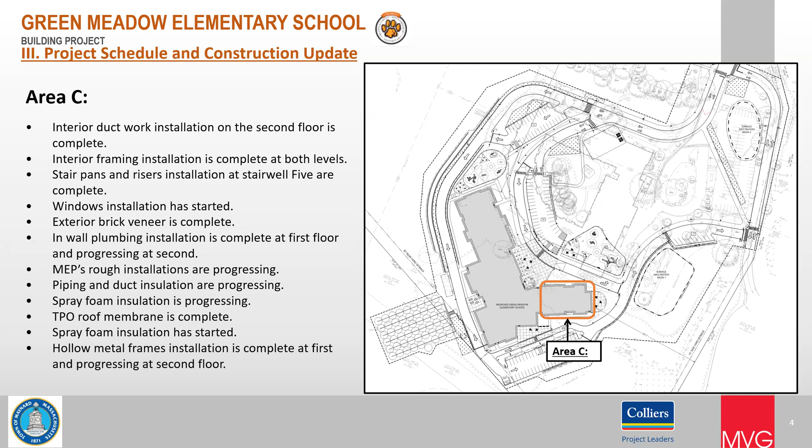Piping and duct insulation is progressing. Spray foam insulation is progressing. TPO roof membrane is complete, and spray foam insulation has started. Also, hollow metal frame install is complete at the first floor and progressing at the second floor.

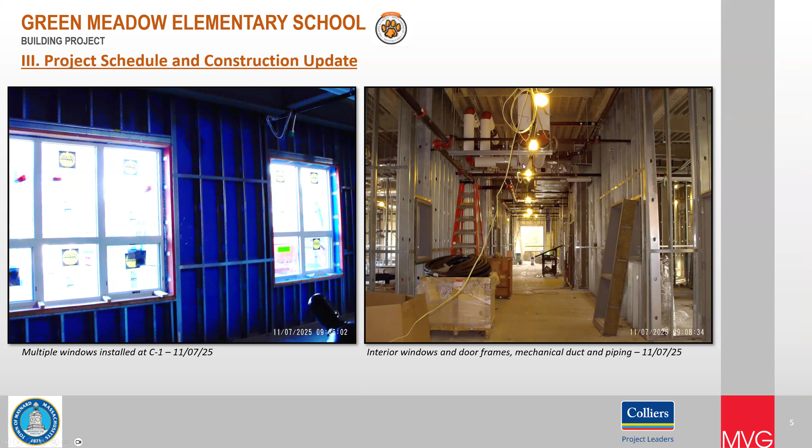Moving on here, a couple pictures. To the left here you've got the window install at C1 that I just talked about. And on the right-hand side you have some interior windows and door frames, mechanical duct and piping.

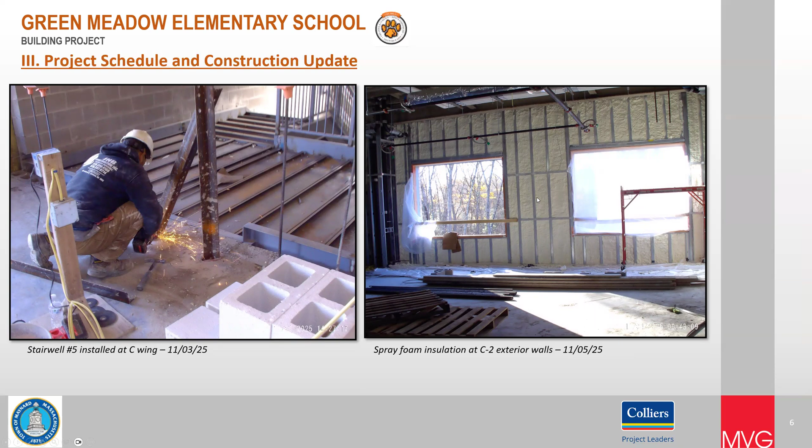Moving on to the left-hand side, this is the stairwell number 5 installed at C-Wing. And here's a picture of the spray foam installation at C2 exterior walls.

Area A - this is right in the middle of the building. MEP rough installs are ongoing and progressing. Interior metal framing is ongoing. Window framing is complete, and AVB installation is complete.

The roof membrane is progressing in Area A. Concrete slab on grade is about a third complete.

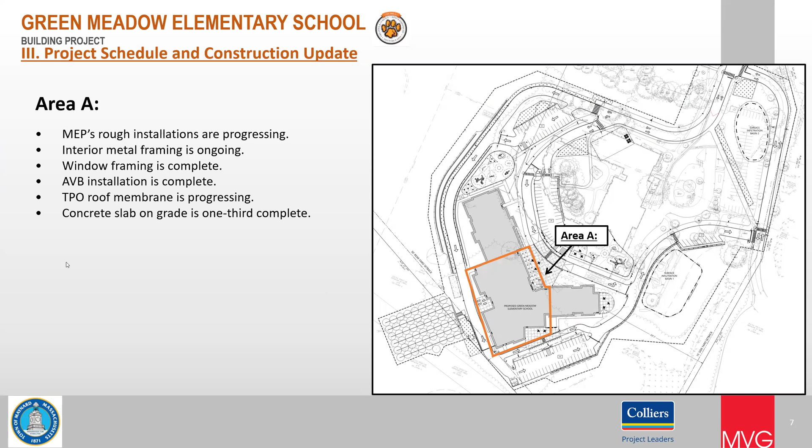Here are some pictures of Area A. On the left-hand side you've got mechanical duct and pipe, and interior framing complete at A2. On the right-hand side you get the wire mesh and vapor barrier install - this is Area A1 office.

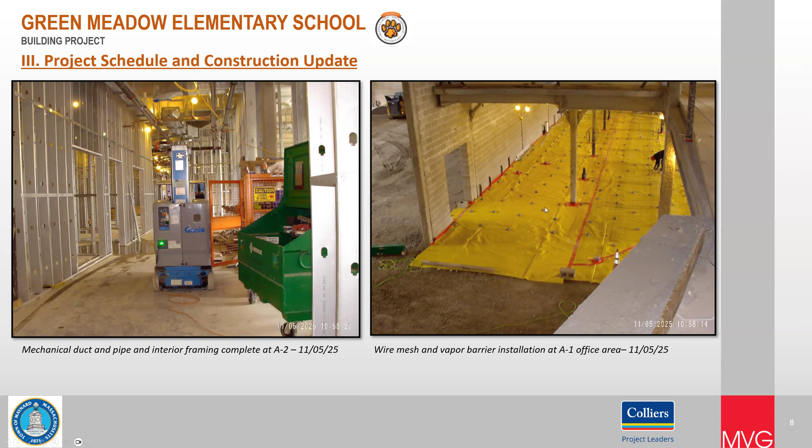Here's a good picture of backfilling and compacting under the slab. This is in A1, the gymnasium area. And on the right-hand side, this is the concrete placement at the kitchen and mechanical room, A1.

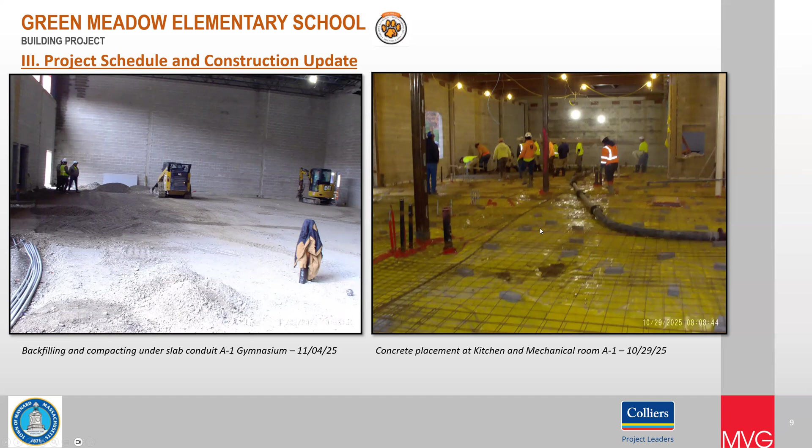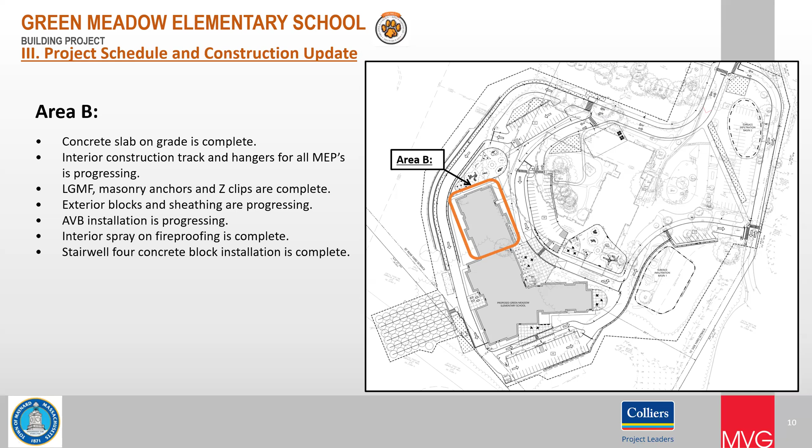Moving on to pictures, left-hand side is concrete placement at B1 slab on grade, which was completed last Wednesday. On the right-hand side, stairwell number 4, the CMU blocking is complete.

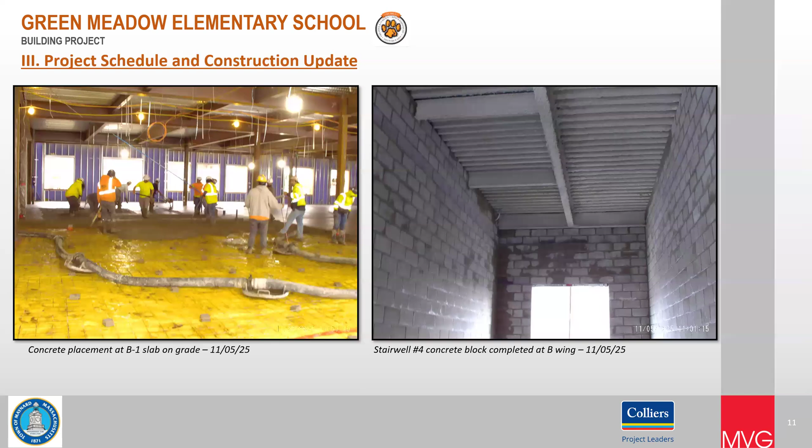Here's the picture on the left-hand side, exterior sheathing, which is ongoing at B-wing west side. On the right-hand side, mechanical duct and piping progress.

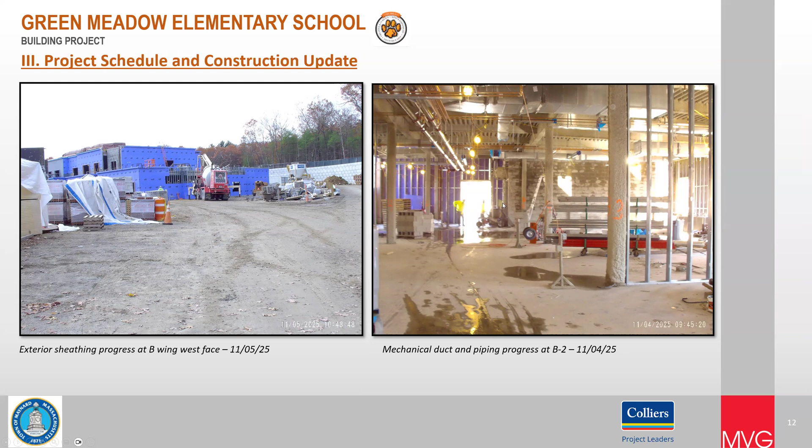Touching on some of the site work: excavation for the solar canopy isolated foundations is complete. Install of water main valves and hydrants is progressing. Driveway leveling and compacting are progressing. Cast-in-place concrete at the retaining wall is complete, and excavation and concrete encasement around duct banks are progressing.

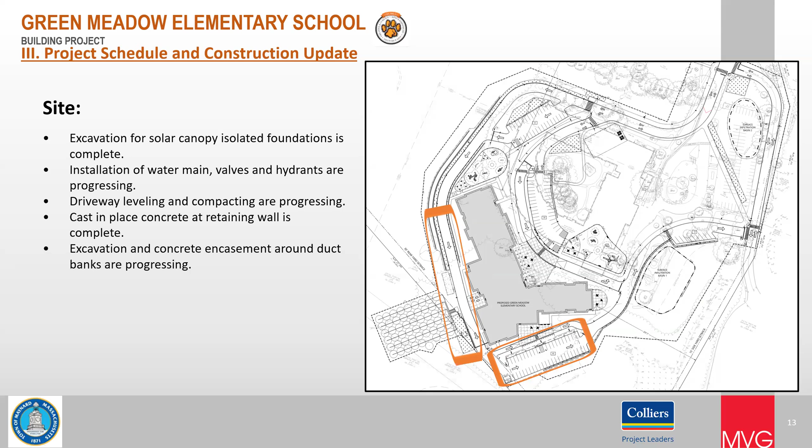A couple pictures here, left-hand side water line excavation and install north of B-wing. On the right-hand side is the electrical duct bank to the battery pad that we talked about at the last meeting.

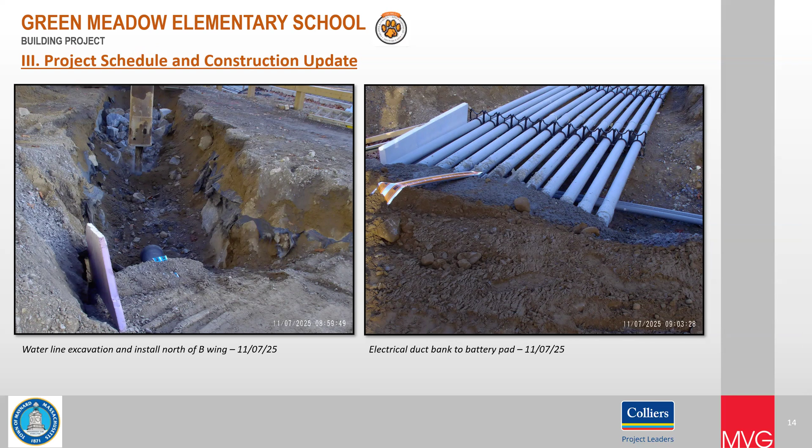Two more here, these are the isolated foundations of the solar canopy. Excavation is complete, that's the retaining wall in the back, it has been backfilled. And here's a fire hydrant installed at its final location along the drive.

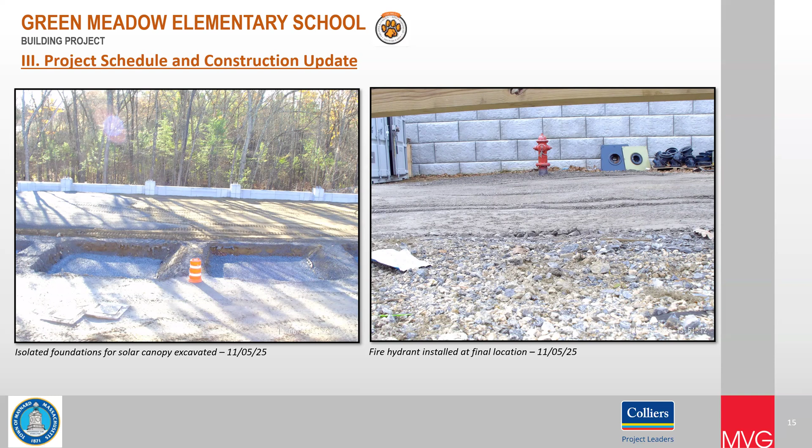Here's a nice picture that was captured by Maynard PD and sent out a couple weeks ago, nice drone aerial pictures. These pictures come out awesome. They also put together a video, I don't know if you guys saw that, but they do a really good job. It gives a great overview of the progress made and where it is in comparison to the existing school. You get the drive back here, this is the geothermal well field. Kind of got cut off here, but this is where that big retaining wall is in the back, and also the retaining wall on this side. You got the temp playground over here.

Any questions on any of the progress made so far?

Quick thing, Brady, just a comment, not a question. Since I was involved for 7 years with the high school construction, before we had Zoom, it was all live meetings. For a handful of us who got to actually go in and see the construction weekly or bi-weekly, that was great, but most of the committee members did not get to see the construction. Having these meetings like this, more people can attend, and putting the pictures out and explaining where things are, more committee members, at least in my mind, get to see the real progress of what's going on. I think it's great, nice job.

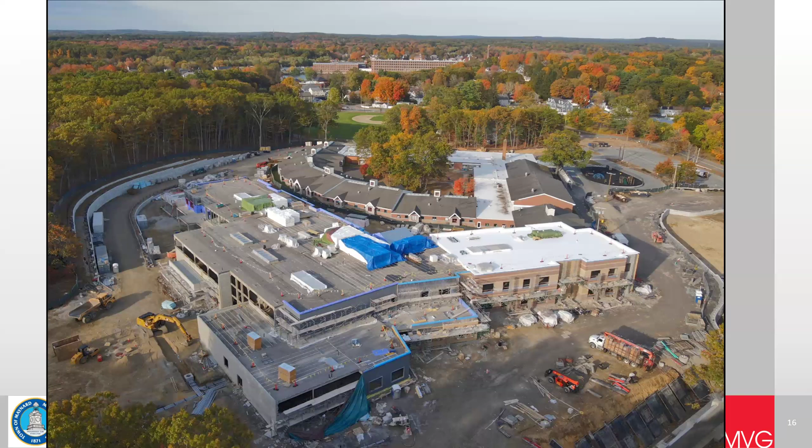Perfect, all right, so that's it for the construction update. We'll move on to the project budget update.

Since we last met on October 6th, we have 5 new invoices plugged into the project budget. Starting at the top, MVG's October invoice, $82,000. Beacon Integrated Solutions, solar consulting services, $680. Colliers Project Leaders, October invoice, $63,738.50. UTS, material testing, $8,035. And CTA's construction October invoice in the amount of $4,579,618.10, for a total of $4,734,071.60. Jump to the next slide here.

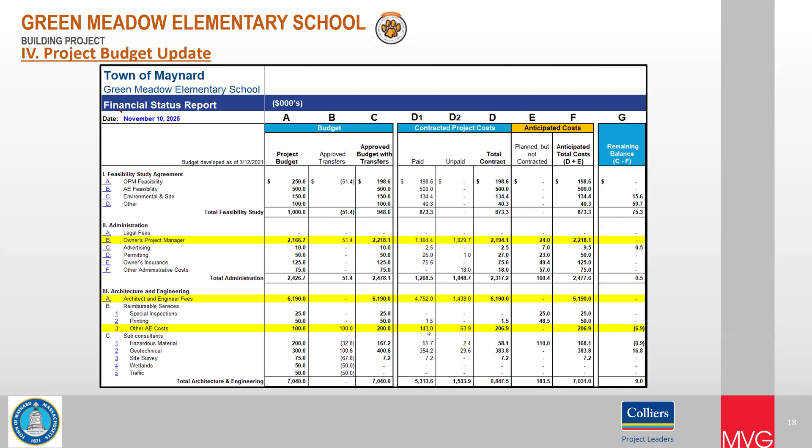In terms of the OPM budget line item, the paid went up to 1.16 million. MVG basic services paid went up to 4.75 million. Other AE costs is where we captured the solar consulting services, that invoice paid went up to 143K. Moving on, CTA's construction line item paid went up to 20,050,000. And material testing, that's UTS, the paid went up to 112,900.

Any questions on the project budget update?

Great. So just so everybody knows, we're on schedule and we're on budget. So all good news.

Okay, and then I guess the last thing is the designer update. Chris, you want to take it away?

Yeah, sure. Thanks, Brady. So as usual, every month we continue to work with CTA and our consultants, make sure all the RFIs are responded to, submittals have been reviewed, approved, etc. Those that don't meet the contract requirements, we will reject or ask for a revise and resubmit. So that's ongoing. Things are going well.

Things are easing up a little bit on just the hot items, etc. But we're continuing to work with CTA to make sure they have everything they need so as not to impede progress, schedule, and costs.